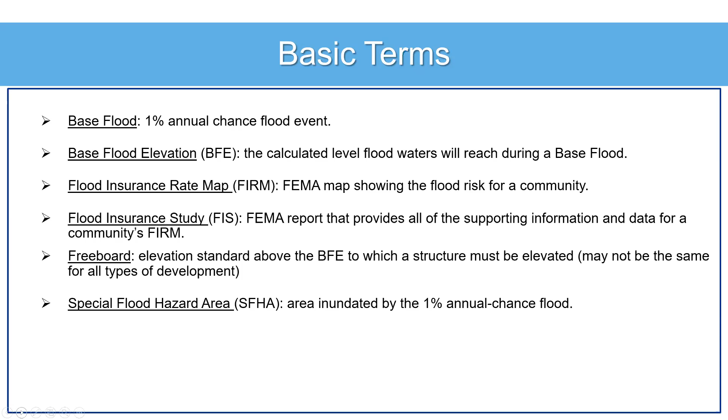And so all local regulations in Oregon are required to at least follow what's in the Oregon Model Ordinance. This Model Ordinance was updated in August of 2019. You can find it on DLCD's website if you want to go back and refer to it. And so in that Model Ordinance, and what should be in your own local ordinances, are these two definitions. And these definitions will really provide the foundation for how we deal with substantial damage.

So the first one is substantial damage itself. I'm going to read it out loud, and we're going to go through each and every piece of it. Substantial damage is damage of any origin sustained by a structure where the cost of restoring the structure to its before-damage condition would equal or exceed 50% of the market value of the structure before the damage occurred. This is really all it is. This is what substantial damage is. And we're going to break down each of those pieces and make sure we all understand how it applies to various applications of it in a post-disaster situation.

Substantial improvement is a connected definition, and it's important to remember that these are connected. A substantially improved building includes a building that has incurred substantial damage. And it's important to note that it's considered substantial improvement even if the actual repair work isn't actually performed. And we'll get into that in the next few slides.

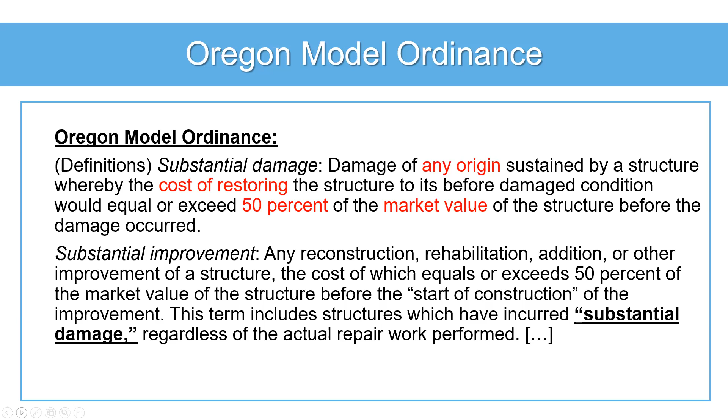So another quick reminder, in the model ordinance and in your local ordinance, a floodplain development permit is going to be required for anything—whether that's someone constructing a new building, doing a substantial improvement, or any other aspect to their property, if it's in the special flood hazard area. You may have this embedded in another permitting process like your building permit or some land use permit, but something akin to this will be in your floodplain ordinance.

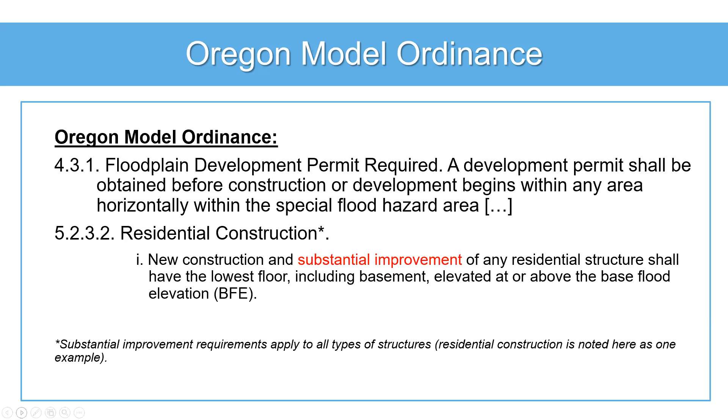The requirement for substantial improvement and substantial damage really applies when we look at the requirements for different types of buildings. This is an example for residential construction: new construction and substantial improvements of any residential structure must be elevated to the base flood elevation or the freeboard standard. You'll find similar language in the code sections on non-residential construction and other building types. That's where you'll find all these pieces tied together when an applicant asks you to show where it's required in your code.

So what does this really mean? We've connected the dots in the code. It means that any substantially damaged structure, caused by any source, has to be brought into compliance with your current regulations. As part of that, at the end of the project there needs to be certification of elevations from a surveyor—often on an elevation certificate, though you might use another form—demonstrating full compliance, that the lowest floor is at the base flood elevation or freeboard, and that any crawl space or area below meets the standards too.

Where this really plays out in practice is if a home was built either before the first flood maps came into effect in your community, or after the first flood maps when the BFEs went up due to a map change. That's where a substantially damaged house, for example, would have to be rebuilt or repaired to comply with the current standards and current base flood elevations.

Say a house has the lowest floor as it was before it was damaged by fire, as an example, and that lowest floor was 3 feet below the base flood elevation—maybe it's a slab on grade house, so the flood depth here is 3 feet. When they come in to request a permit to rebuild that structure under your substantial damage regulations, you have to make sure the property owner is proposing a new or repaired house where the lowest floor is 3 feet higher than before.

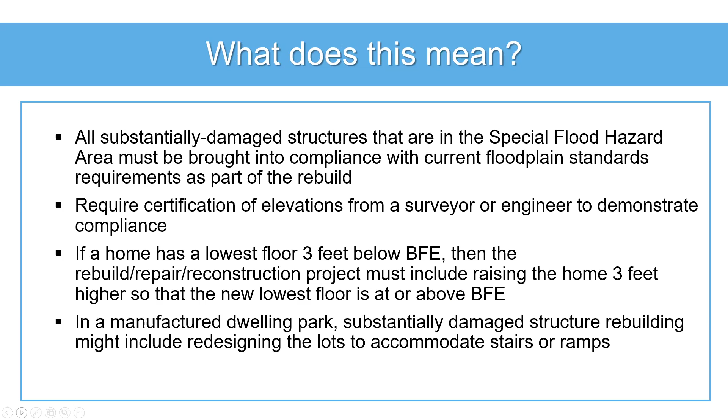Where that lowest floor is at or above the BFE or your freeboard standard. In a manufactured dwelling park, what this might look like for repaired, substantially damaged buildings may be a redesign of some individual lots. If there's a requirement for a long set of stairs or a ramp, some pads might have to be readjusted or redesigned so they can meet the floodplain management requirements.

These substantial improvement and substantial damage requirements are admittedly very tough for local governments to implement, and they're among the toughest standards in local floodplain regulations. But it's really important to remember that they are required—this is a key, fundamental piece of the National Flood Insurance Program floodplain regulations.

What it really does is make sure that where there's an opportunity for people to rebuild in a better way, families that occupy the house or building in the future will see fewer flood losses. There will be incredible savings on flood insurance if they were paying it before and are paying it again now. That means in future flooding events, elevated buildings recover faster, those families recover faster, and the community overall recovers faster—translating into reduced disaster costs, a key part of why the National Flood Insurance Program exists.

And fundamentally, a house is typically a family's biggest investment, and making sure the house is as safe as possible protects the family and the investment they've made into the building.

There definitely are costs of a community not complying with these requirements for substantial damage. Obviously, it's evident that a house that's allowed to be rebuilt out of compliance below the BFE as it was before it was damaged means that it's just going to get flooded in the future. We know that, we're going to see that. This house may have seen it in the past, so it's important to keep that in mind.

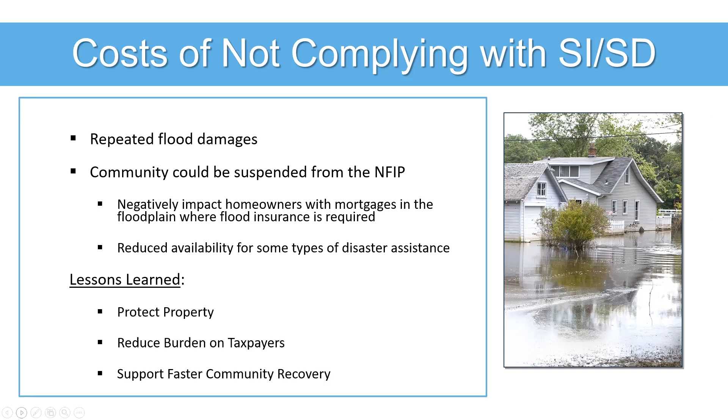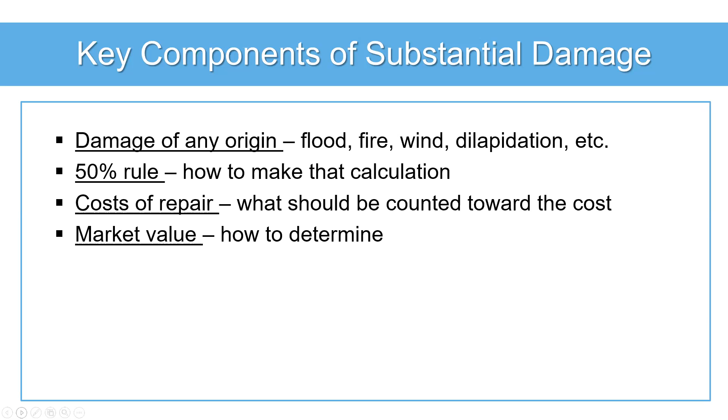So let's break down substantial damage. When I read off the definition before, it contained 4 pieces. Substantial damage can be caused by any source, whether it's flooding, wildfires, earthquakes, and we'll get into each of these. Then the 50% rule and how we make that calculation. And then we'll look at the costs of repair, what's to be included, what's not to be included, and how you require those costs to be made. And then the market value. So we'll walk through each of those in the next couple of slides.

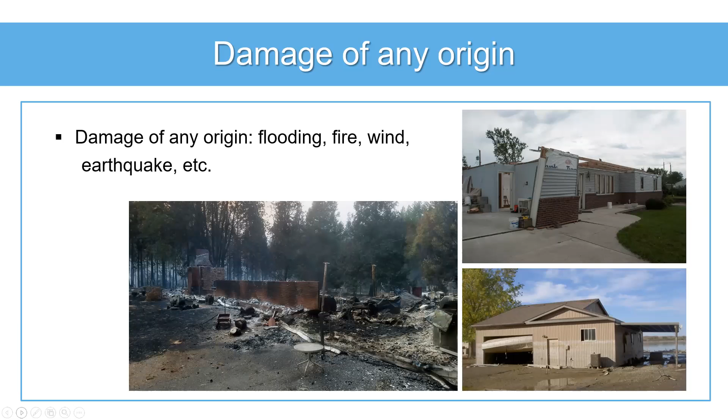So the first thing is substantial damage. It doesn't matter what caused the damage, the substantial damage rules apply. In this case, we're dealing with lots of wildfire damage structures, and while it's not flooding, the substantial damage rules still have to be applied. So we see this when there's flood damage, often when there's fire damage, wind damage, earthquake, even if a car hits a house and knocks a bunch of walls down, that counts.

And so when we look at the 50% rule, it's a pretty straightforward calculation. You look at the cost to repair the damage, regardless of whether those repairs are being made, and then you compare that to the pre-event market value. We'll break each of those down in the next couple slides, and then you look at that ratio. If that ratio is higher than 50%, then it's considered substantially damaged. If it's lower than 50%, then it's not. Some of your communities may have a different threshold, a different 50% rule, so just be sure to look at your floodplain regulations so you know that.

So let's look at an example. If a house's market value before the damage is $150,000 just for the house, and the fire causes $90,000 of damage, then you simply look at that calculation: $90,000 divided by $150,000 is 0.6. Multiply that by 100, gets us a percentage of 60%. And that's a very clear substantially damaged property.

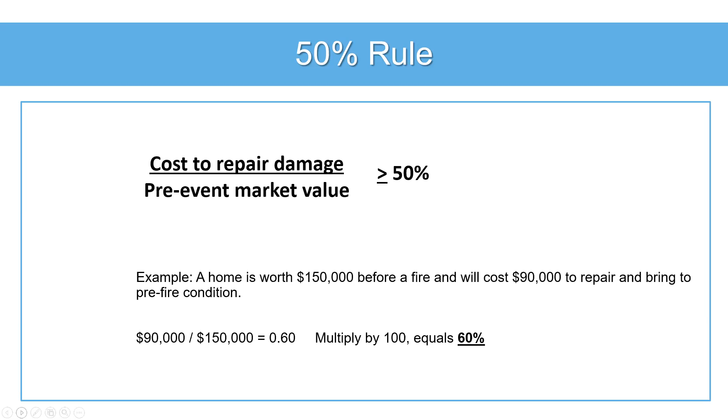So then when we look at that equation and try to break down each of those components, the first thing is trying to figure out what the costs of repair should include. Really what this means is any damage costs to any part of the building itself, so we're looking at the roof, the walls, the doors, the windows, electrical systems, HVAC systems, any other built-in appliances — all count as repair costs that need to be included here.

And then when we look at the cost to actually do the repair, they have to include both the material and the labor costs. The big thing here, and where this can get a little bit tricky, is when any part of the rebuild might be done by either the labor or materials of the owner, or if they're donated materials. Even if they're donated or being done by volunteers or the owner themselves, they have to have some sort of market value of those materials and labor as part of the permit to make sure this equation is fully fleshed out.

And then also what must be included are any other improvements. If as they repair the house, they're going to add a deck, those have to be included as part of the total cost of repair, the total cost of the improvements as well. And there are a couple things that can be excluded — temporary emergency measures can be excluded from the costs.

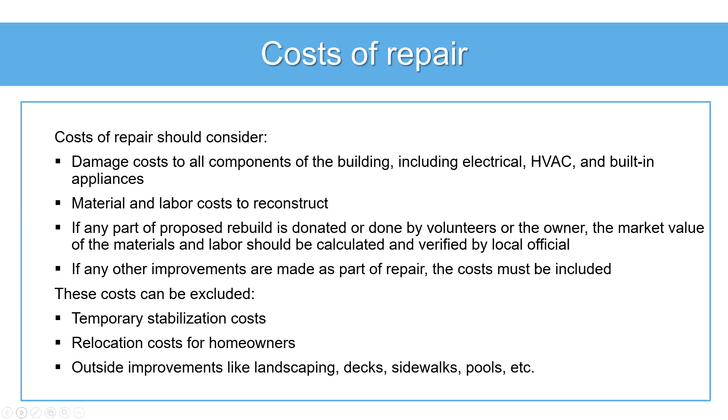Some of the interior contents can be excluded, relocation costs, and anything that's not attached to the house. So landscaping, sidewalks, decks that aren't attached to the house, those can be excluded from the cost of repair. One thing we'll make evident in the next slide is a spreadsheet that's an example of

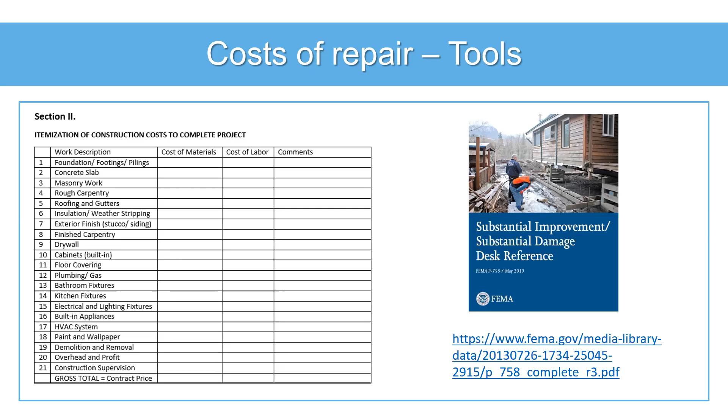what you could require from property owners to demonstrate what these costs are. On the right side of this slide, you see the Substantial Improvement and Substantial Damage Desk Reference. This is a fantastic FEMA resource that goes through all of this in great detail. If you have a question about any component of the repair, you're going to find the answers here. We're going to show this multiple times, so please download it, print it off, whatever you need to do to make it available to you.

Then the second part of that equation is looking at what the market value of the structure prior to the damage was. That's a really important thing, and sometimes it can get a little tricky to apply. Unfortunately, the NFIP and FEMA don't define what market value is. We just provide guidance on what you should use in your community. Every community is a little different, so you're going to have to assess which is most applicable.

Big things to keep in mind: you're only using the value of the structure, not the entire property, so try to find that in the market value. And you're using the value of the structure before the damage occurred—so even if it's a couple years after, you're still using that pre-damage value for the market value.

In general, there are three typically acceptable ways we use to demonstrate and determine market value. We can use the assessed value—that's an easy resource and an easy set of data to get. When it gets close to 50%, typically you look at the adjusted market value and talk to your county assessor for information on exactly what that means. We can get into that if any of you need more help.

Then, if it's applicable and useful, you can use estimates of a structure's actual cash value. That's kind of the value of the building and materials itself, and that typically includes depreciation. This can be used when assessed value isn't a great resource.

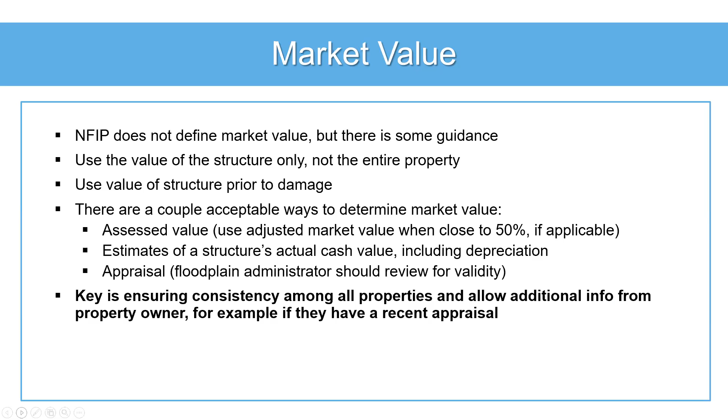The main thing with market value is just making sure you're using the same type of market value for all properties. So what most communities do is use the assessed value for everything, every property. Then if a property owner has an appraisal or gets one on their own, that can be used as a more accurate market value than the assessed value. The big thing is just making sure it's consistent.

So those are the key components of substantial damage. Now what we want to do is transition into some of the other main floodplain requirements and how substantial damage fits into them or other aspects of this disaster.

The big thing you deal with most of all is applying floodplain management regulations to new or substantially improved buildings. So if a reconstructed house is being proposed, it's really important to make sure you're making the property owner elevate that new or repaired structure so its lowest floor is at the base flood elevation or whatever your freeboard is.

In a lot of cases, that means houses are going to be built on crawl spaces. The other thing you have to make sure is that the crawl spaces have flood openings that meet the 1 square inch of opening to 1 square foot of enclosed space in that crawl space. We look at net area in those calculations.

If a house is being elevated on stilts of some sort, piles or piers, that's a perfectly acceptable foundation style too. The other thing is making sure the proposed building utility systems—like electrical, heating, air conditioning systems, the ductwork—are also elevated or dry flood proofed to the base flood elevation or the freeboard. That's a really important piece, and sometimes the permitting systems you have don't necessarily tie those together, so make sure you catch that when looking at substantially damaged and repaired properties.

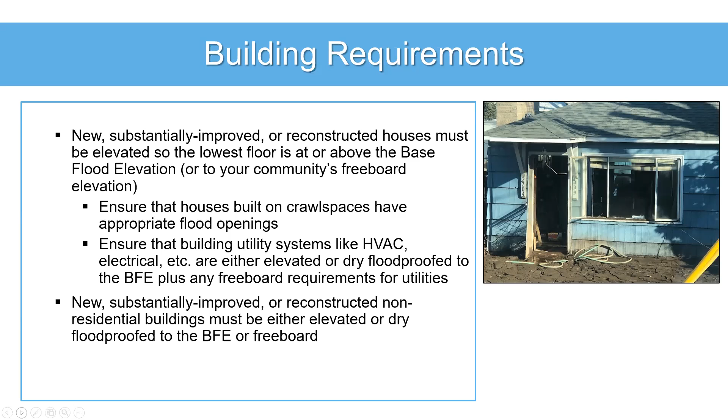And then similarly for non-residential buildings, we're applying these same standards, including the requirement to be dry flood proofed if the non-residential building owner wants to do that.

Another development type your community might face is manufactured dwellings. If these are substantially damaged, the rules for manufactured dwellings apply, and your floodplain management regulations should have something specific to manufactured dwellings.

The big thing here is that the bottom of the chassis frame, the longitudinal chassis frame, has to be at the base flood elevation or higher, or to your freeboard standard. If you're dealing with coastal floodplains, this is actually 1 foot above the BFE, or to your freeboard standard.

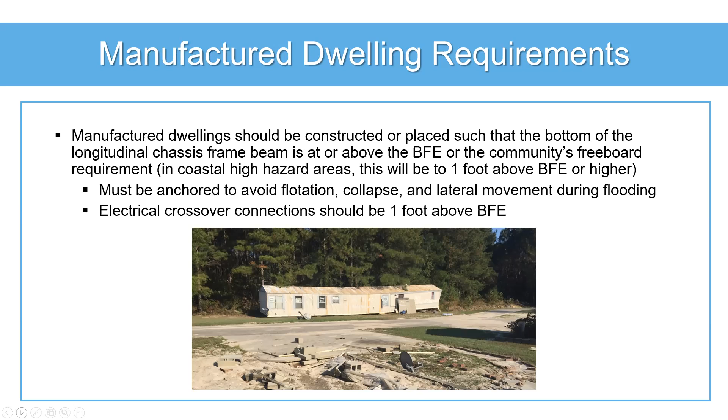Make sure you find that in your floodplain management regulations and apply it. The other key thing about manufactured dwellings is that they have to be anchored down. There are a couple different ways to do that, but they have to be anchored so the buildings don't float away, don't collapse during a flood, and don't move off their foundations during flooding. Any electrical crossover connections also have to be elevated to 1 foot above the base flood elevation.

This doesn't quite get at substantial damage, but I know it's going to come up in our post-disaster world: recreational vehicles. The key thing to remember is if these are going to be placed in the floodplain, they have to be licensed and ready for roadway use, and they have to be on site for 180 days or less.

Those two components have to be there, and that's really important because recreational vehicles, if they're on site for 180 days or less and road ready, don't necessarily have to be anchored down. That's a real risk for people who might be living in them as temporary housing while their house is rebuilt.

If someone wants to place their RV in the floodplain for longer than 180 days, you essentially have to treat and regulate them as manufactured dwellings—elevated to the base flood elevation and anchored down. And if any of these are placed in the floodway, you still have to require a no-rise analysis to be done.

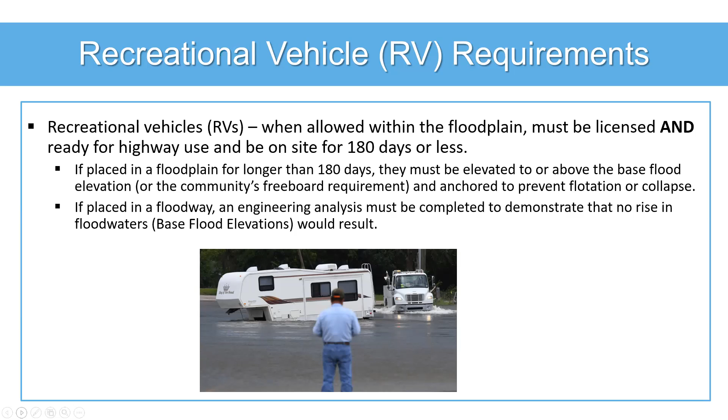That gets us to the floodway requirements. The big thing to remember is for any substantially improved house or other building in a floodway, you have to make sure a no-rise analysis is done. We do that through the hydrologic and hydraulic, the H&H analysis, and that has to be a key factor of this.

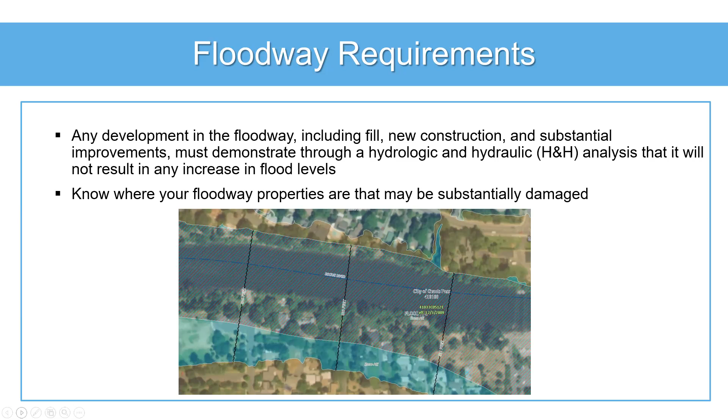Remember too that we don't allow the concept of a floodway shadow to be used as part of these analyses. So the big thing to know as you're looking at substantial damage is where your floodway properties are, so you can make sure this additional requirement is placed there and property owners know.

A big question that's probably brewing in your mind already is: what about variances or exceptions to this rule? The big thing to remember is that variances absolutely should not be granted from these substantial damage or substantial improvement requirements.

While people may see this as an economic hardship, and hardships are in the variance criteria, just because it's expensive is not a good reason for a variance. FEMA does not allow that, and it will be treated as a violation if it is granted.

The only exception we see is for historic structures, and those are dealt with on a case-by-case basis. If you have any, or think you have any, reach out to Celinda or me and we can help walk you through what this exception might be. An exception for a historic structure is also going to need costly flood insurance, so there are a lot of factors to go into evaluating this.

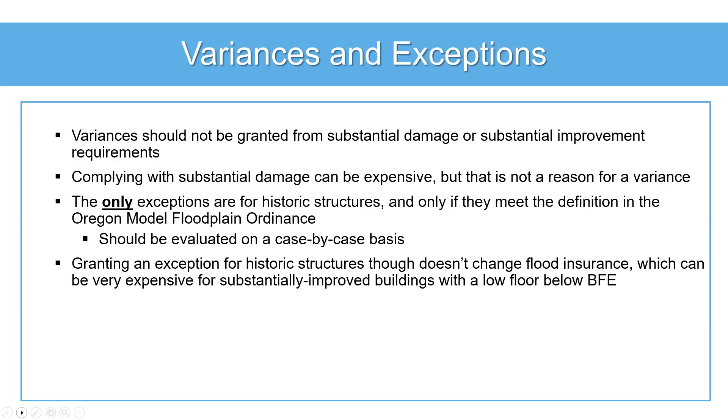Just a reminder that if there are any violations to your floodplain management regulations, the community could be at risk if those violations aren't corrected. Unfortunately, in a post-disaster world, whether post-flood or post-wildfire, this is where violations pop up so often. We want to make sure you all have the tools you need to apply this well so you don't have violations.

Violations are anything that doesn't meet the minimum standards in your code. So if someone rebuilds at grade without elevating their property and it's substantially damaged, that's a violation. And if it's not corrected, the community could be put on probation and ultimately suspended from the NFIP.

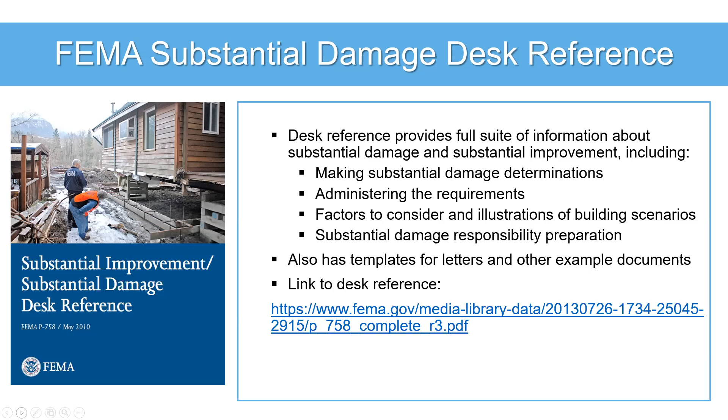Now I'm going to turn it over to Celinda, and she'll walk through some of the community responsibilities. Thanks, Mitch. So after an event happens, there are some key community responsibilities you'll want to be aware of. The first and major one is to communicate with your emergency management staff and others at your agency to track and assess damage to substantially damaged structures within floodplain areas. It's key that even if it's not a flood, in situations like this where it's a wildfire, that you determine what structures in your floodplain were damaged and follow through with the process we're going to talk about here.

The other is to make sure you're implementing your floodplain regulations for any reconstruction, rebuilding, or repairs, so that you don't rebuild or repair in a way that gets you out of compliance with the NFIP. I'm going to dive into each of these a little deeper in the following slides.

Ensuring floodplain permits are obtained is part of making sure you're applying your regulations. You can't apply them if you don't know the work is happening.

Providing notice of substantial damage to property owners helps people whose structures were damaged in the floodplain understand what that means for their properties, and what substantial damage means for their rebuilding efforts.

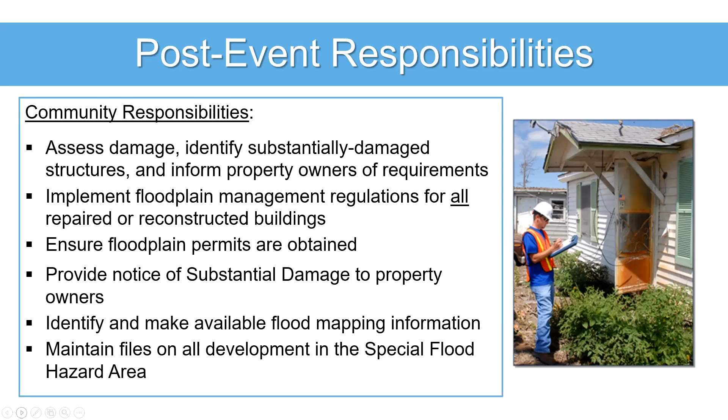So just for a little refresher, what does doing substantial damage determinations really involve on a property by property basis? As you're looking at structures, you're going to assess, first off, is the building in a special flood hazard area? If it's not, then you do not need to do the substantial damage determination. This is only for properties in that special flood hazard area, your riverine or coastal flood zones, your floodways, and for that 1% annual chance, or 100-year flood.

So if the answer is yes, then you're going to assess: is the structure substantially damaged? That's when you do the calculation Mitch went over earlier, comparing the cost to repair the structure versus the current pre-disaster or pre-damage event market value of the building. If the cost to repair is more than 50%, you need to go forward to the next step, which is communicating with that property owner about the requirements for that building to be brought into compliance with current floodplain regulations when they rebuild or repair.

If it is not more than 50%, it still needs a floodplain permit. It's still subject to substantial improvement requirements, but it is not going to be determined as substantial damage.

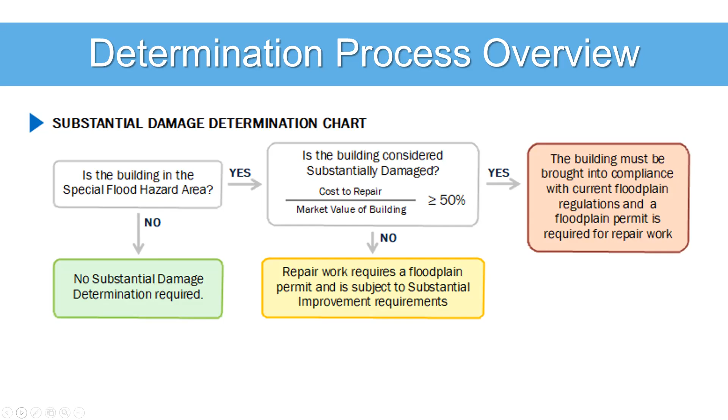Now, to get into the nitty-gritty for all of you floodplain administrators that are watching this, it's really important that you understand what your role is.

As Mitch alluded to in the Oregon Model Floodplain Ordinance and in your local codes, there are requirements that you as floodplain administrators do substantial damage work, as we talked about before, inventorying what structures within your community's floodplain were damaged by an event. This could be an event like we've just had, the wildfires. It could be a one-off house fire, a flood, a wind event. We get lots of those here in Oregon. It could be a lot of different things that have caused the damage.

But it is up to you as a floodplain administrator to track and work with your emergency managers to pay attention to when structures in your floodplain are substantially damaged. What we recommend is that you obtain maps or GIS information, whatever your community has the capacity to do, to help you track that.

What we can provide, and we'll be sending out to communities when disaster situations happen, are some tracking spreadsheets that will help you compile the following information for each structure: the address, and the assessed market value, which is typically what we have here, although if you have another way of calculating market value, you could put that in as well.

The age of construction, so that you know if it was put in place before your floodplain regulations took effect or afterwards, so whether it was probably built in compliance in the first place. The type of structure, residential or non-residential, it's really important to make that determination. Other information can be helpful when it's available. In all cases it's not, but when you have it, you can add it in, like the type of foundation.

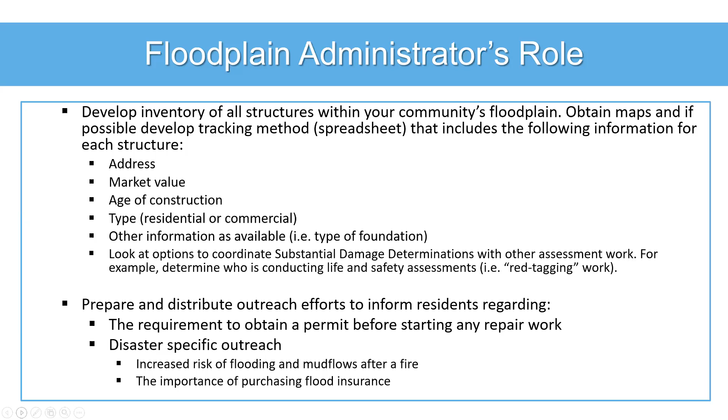The next thing you want to do on the outreach side is get the word out about what substantial damage determination really means for them. Let them know, yes, you need floodplain permits, you need to come in and talk to us if you're in a floodplain and you're going to rebuild. Have a conversation with you as a local and resident. Some ways you can do that are press releases and letters.

It's hard after wildfire in some cases to do letters because there's no mailboxes to send them to, there's no structure to post a notice on. So sometimes there's creative solutions, like signs at the entranceway to manufactured home parks or housing developments, or getting the word out on social media.

Really, whatever networks and ways your community has to interact with residents, use them. You know best how to reach your community members, but be sure to get the word out about the topics I already mentioned, and also about the substantial damage assessments and determinations and what that means. If somebody's property is substantially damaged, that determination is made — what does it mean for them when they have to rebuild?

Like Mitch talked about, it means they have to bring their structure, or their new structure as they're rebuilding, into compliance with the current floodplain regulations. If it's an old single wide or a very old structure that's been there for many years before your floodplain regulations took effect, this might mean a significant change to what has to be there on the ground when they rebuild compared with what was there before. That can mean elevating structures and a lot of things. So it's really important to communicate to them so they understand what they're really facing when they're rebuilding.

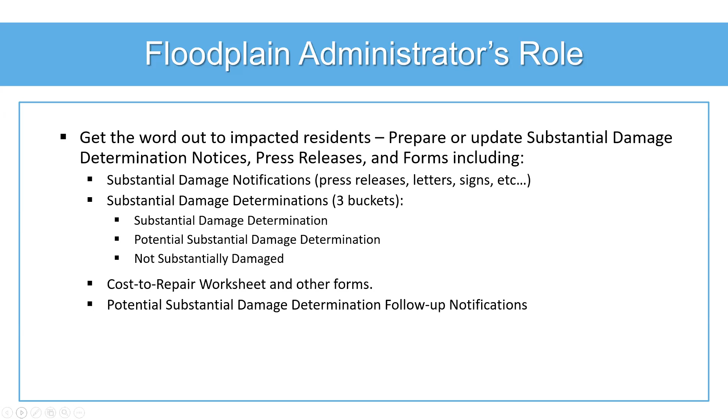Now, the cost-to-repair worksheets and other forms that Mitch has already covered are there to help people understand what costs they have to include, to help you do substantial improvement assessments — to say, okay, when you're rebuilding, how much work is actually required to bring this back up to safe standards. At that point, it'll help you make an actual determination regarding whether the property was substantially damaged, and whether it's being substantially improved for those that were potential.

And these are plug and play ready — as you can see, you can just put in the community's name or information. There's a whole host of these we're going to try to provide to you via the website, so you can use them to help get the word out with as little effort as possible, as I know you guys all have a lot going on already.

So a couple other really important things for you to take into consideration and do now: talking to your elected officials regarding the floodplain development permit fees and any potential fee waivers they would consider to help lighten the burden on those that have to rebuild within a floodplain area. There are some cases they will reduce fees or waive them, but obviously that's a conversation for the elected officials.

The other is to review the post-wildfire floodplain permitting process. If there are ways you can expedite your permitting process while still making sure that anything being rebuilt is done in compliance with your regulations, and also still evaluating it for compliance with your local regulations, that's a good way to look at it. What can you do to make things go faster while still ticking all the boxes you need to?

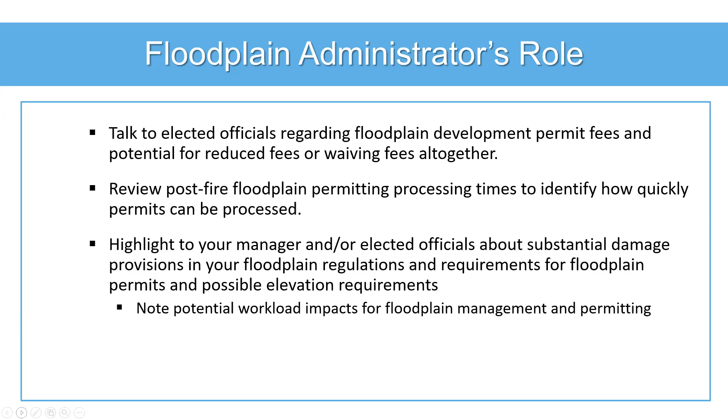That can be a significant amount of work depending on the number of structures damaged. And if it's a wildfire event like this recent one, or something non-flood related, a lot of times your elected officials or other parties aren't going to be aware these requirements come into play, or the amount of work involved. So be sure to message upward what this will take, and reach out to us, FEMA, and our partners for assistance, because you don't have to go through that effort alone. We are here to support you.

The next thing is record keeping. This is extremely important for two different reasons. One, because if you keep highly detailed records of your staff time and the resources used to do this work, you can get partial 75% reimbursement potentially under the Disaster Recovery Reform Act, Section 1206. It can be used in a lot of cases for things like building code enforcement or substantial damage determination work. So there is some potential for reimbursement from the federal government for this work if you keep highly detailed records of who is doing the work, the date they did it, and what specifically they did. You can't be too detailed in this situation.

The other real important reason for good record keeping is to make sure you're compiling information about which structures were substantially damaged, with photos or videos, into a community repository. It can be a single one. Also be sure to get that information, or some notice or record of the fact that a structure is substantially damaged, into your individual property permit files, so going forward, if somebody applies for a permit, it's not missed that it was substantially damaged.

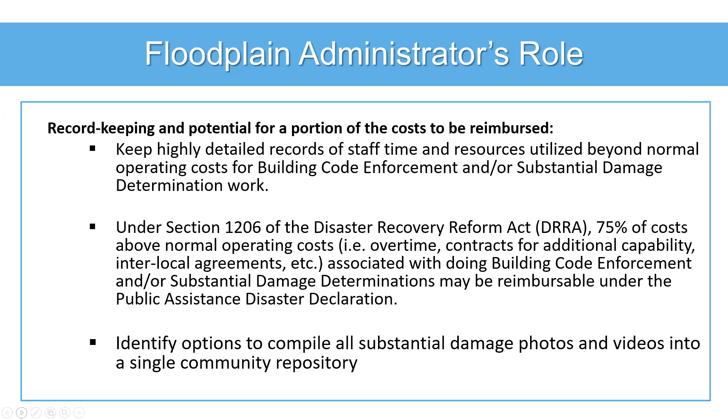A couple other things I wanted to touch on: after major disasters, there is FEMA funding through the Hazard Mitigation Grant Program if a presidential disaster has been declared, and other funding from other agencies that can be used for recovery and mitigation projects.

Where this is important is, as Mitch touched on, sometimes you'll have situations like single-wide manufactured home parks with very small lots where rebuilding the same way as before isn't allowed, because now you have to elevate structures and have stairs or ramps required. In order to redesign them, or potentially buy out portions that are in a floodway or floodplain, you can use FEMA funds with some match, or other funding sources, to address your flood risks so that when you build back, you're safer and more resilient in the case of a future flood.

There's also a couple other considerations. Even though wildfires are a natural disaster, you still have to consider floodplains. While people may not be thinking of a wildfire disaster as needing a floodplain component, it is, when you come to the rebuilding side. So it can be a struggle sometimes for local floodplain managers to get themselves into the conversation, but please make every effort to do that whenever structures were damaged in the floodplain, even though the disaster is something like a wildfire or some other type of event.

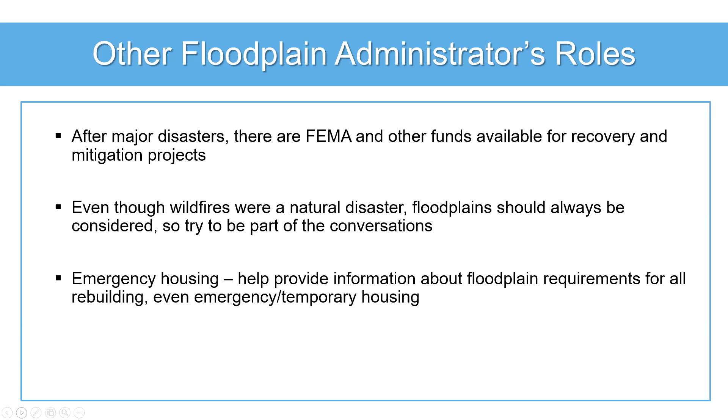So just as a wrap up, the key things local communities and local floodplain managers need to do here after a wildfire event, a flood event, any type of disaster where structures within a floodplain are impacted and you're dealing with substantial damage: review floodplain development and building permits that come in, make sure people are applying for them, get the word out about that, and make sure you're reviewing them and applying your current regulations.

Determine always if the proposed development is actually a substantial damage structure or a substantial improvement, and make sure you're applying your regulations correctly so you stay in compliance with the NFIP. Help communicate to your residents what those standards apply. If they have to change how they're building when they rebuild, make sure you're doing a good job communicating to them what those new standards are so they're clear on how to proceed.

Really, at the end of the day, you are the gatekeepers to ensure that the development within your floodplain is being done in a way that meets the regulatory requirements that your local community has adopted as part of the program to participate in the NFIP.

And really importantly, document your decisions. These are hard times, you can get going really fast, but it's really important that you document your decisions on individual properties, you document your conversations with residents, so that you can show the work you've done down the track when FEMA or the state comes in and does a community assistance visit to look at how your community dealt with this situation after a disaster event.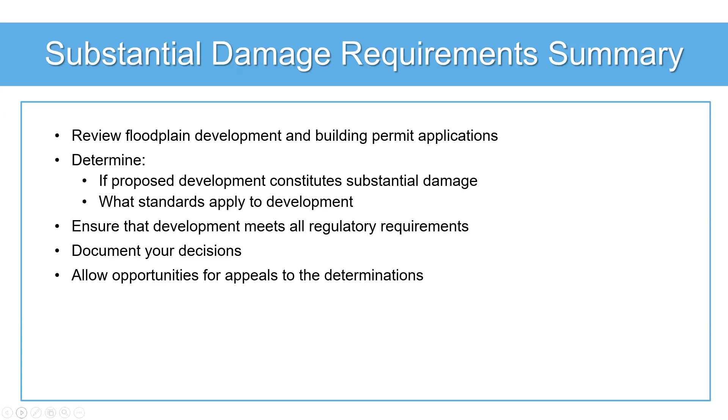And the last is be sure to allow opportunities for conversations. We say appeals here, and it's important that if someone thinks you have not done a substantial damage determination correctly—maybe the aerial imagery looks like everything was destroyed, but it turns out on the ground that's not the case—the main thing is being sure you have a process they can follow where they can challenge that and have their due process to show why they think that determination is wrong. That's an important aspect to consider.

The last thing I'll reiterate before we wrap up is that in a flood-after-fire event, the watershed and the situation shown on your flood insurance rate maps has changed. In the next few years—2 to 5 years or a little longer—the flooding is likely to be a lot worse until the vegetation regrows and the soil rebounds. It's really like a burned earth or concrete situation where water will run through it much differently than it did before the fire.

Please keep working on flood insurance outreach. Encourage people to purchase flood insurance so they will be protected, and include people outside of the special flood hazard area because that flood risk will be increased. Apply a buffer with GIS, or just look at a broader area, and try to convey that there is increased risk. Flood insurance can typically be a lot cheaper if they're not in a special flood hazard area, so it's not nearly the expense they may think to have some extra protection.

Use the resources we've provided and talked about here: FEMA's Substantial Improvement, Substantial Damage Desk Reference Guide. There's also a post-wildfire playbook that the Oregon Silver Jackets team put together—the Oregon Silver Jackets is a multi-agency partnership with federal and state partners—that provides a lot of resources on flood risk considerations after a fire, and goes into other things like erosion and landslides, et cetera.